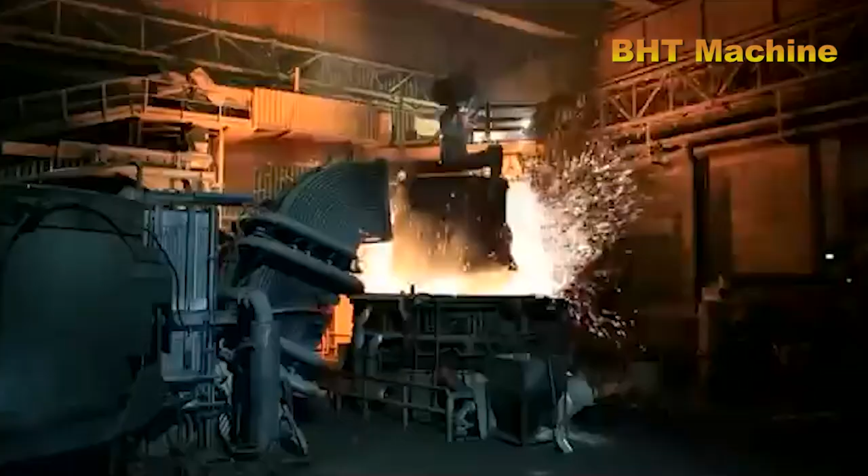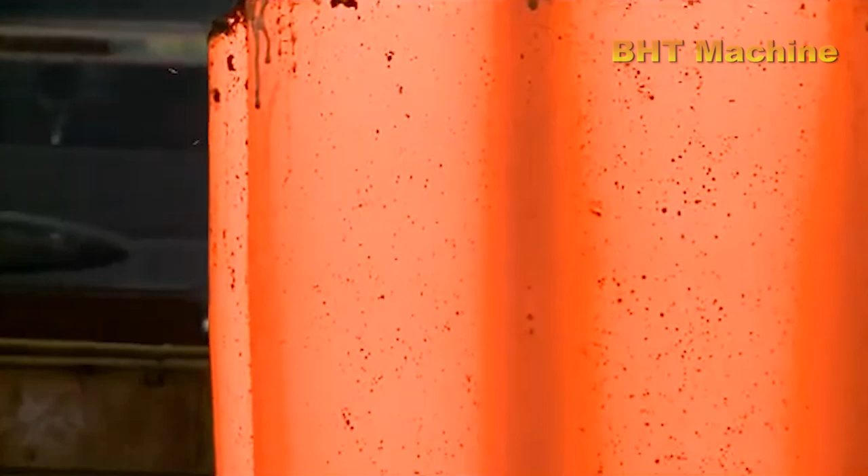Welcome to our video exploring the casting industry, an ancient craft that continues to thrive with innovation and creativity. Casting, or the process of shaping metal, is an art that blends high temperatures, modern technology, and human skill. From ancient bronze statues to advanced machinery components, casting has played and continues to play a vital role in the development of society.

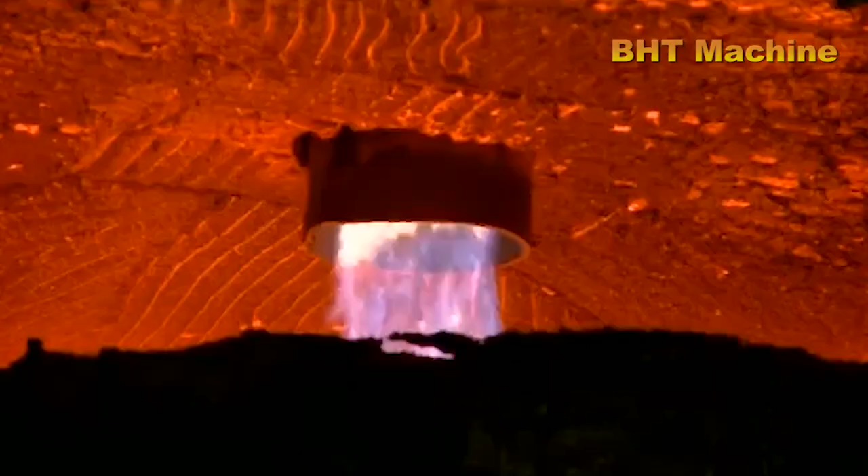Casting is the art of transforming metal into shape, a process that combines heat, technology, and creativity. From melting metal at extremely high temperatures, pouring it into meticulously designed molds, to producing finished products, every step in the casting process demands precision and dedication from the craftsman.

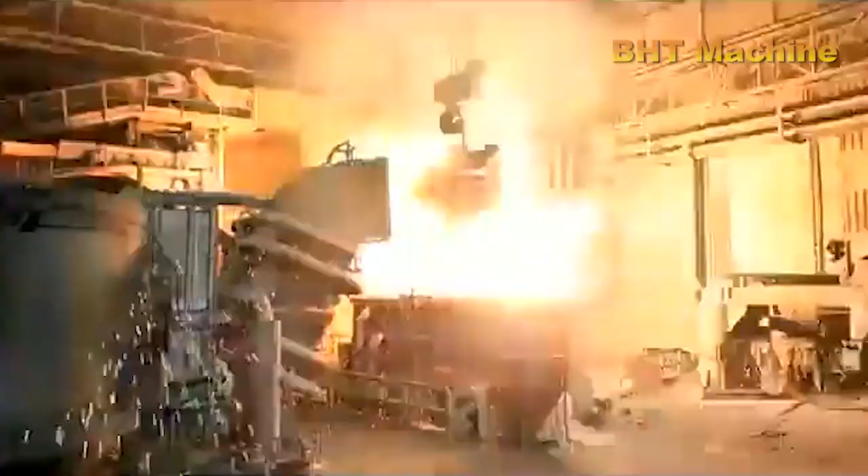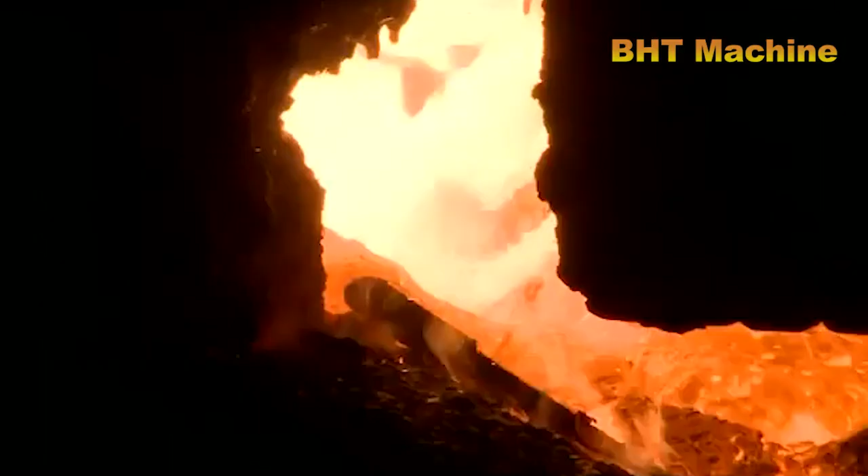Today, casting technology has reached new heights. Methods such as pressure die casting, centrifugal casting, and investment casting not only produce superior quality products, but also enable countless applications in key fields like the automotive industry, aerospace, and construction. These advanced technologies allow for the creation of precise, durable components tailored to diverse needs.

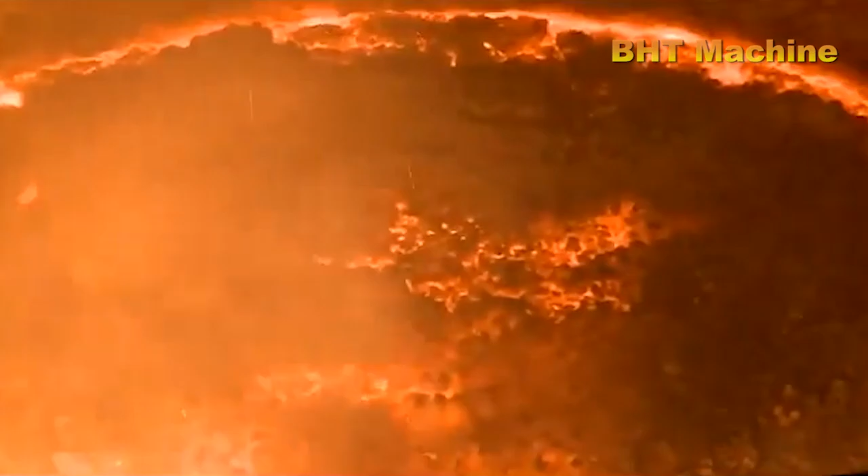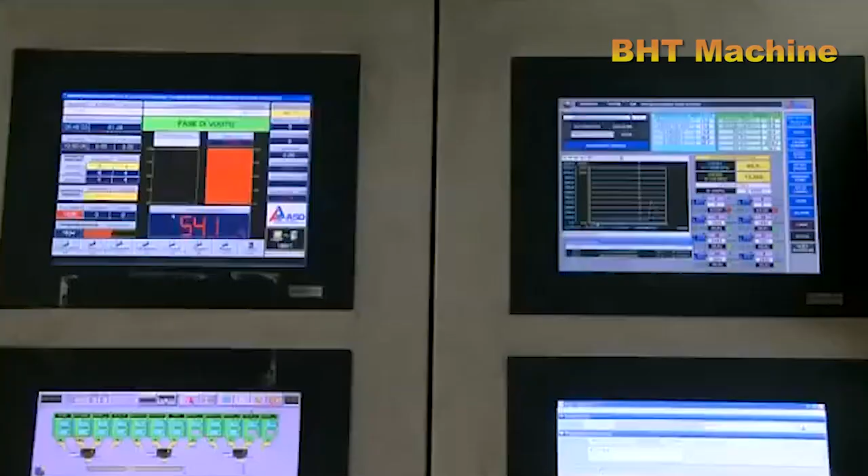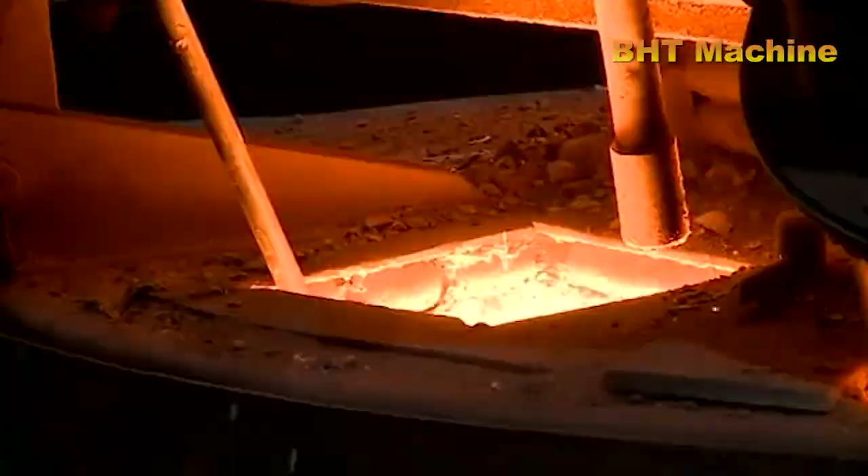Beyond technological advancements, the casting industry is also leading the way in environmental protection. Metals can be recycled almost indefinitely, conserving resources and reducing carbon emissions. Modern foundries are increasingly adopting renewable energy sources such as hydropower and solar power to minimize their ecological footprint. The combination of advanced techniques and a commitment to sustainability has reshaped the way we perceive this industry.

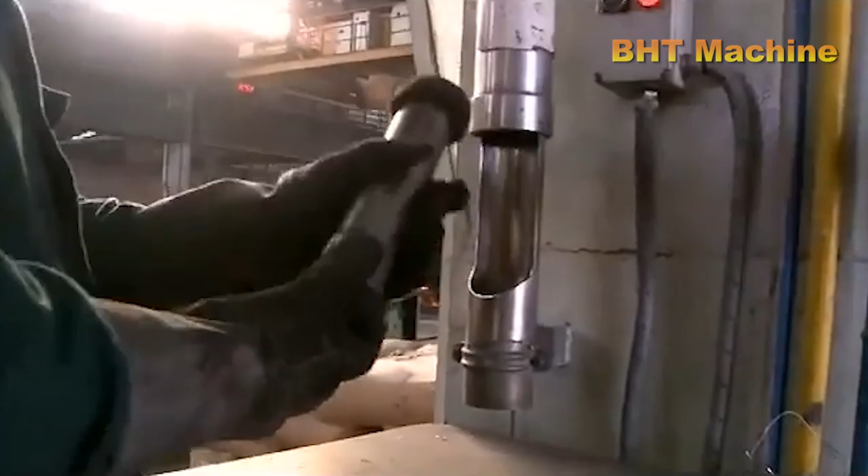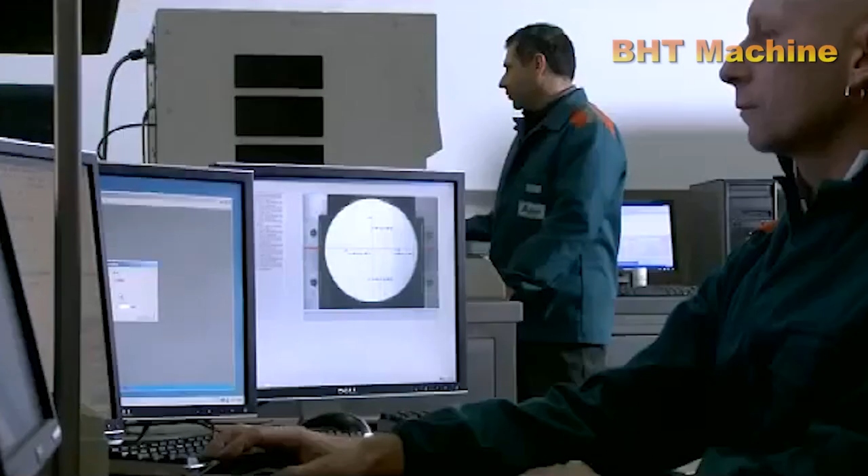Products from the casting sector are not just the result of creativity and labor, but also a testament to efforts to safeguard the future of our planet. Join me as we explore each step of this meticulous process, from melting metal and mold creation to the final product. Together, we'll witness how technology, human skill, and creativity come together to produce remarkable items that enhance our lives.

Casting is more than a profession. It's an art, a tradition, and a leap toward a sustainable future.

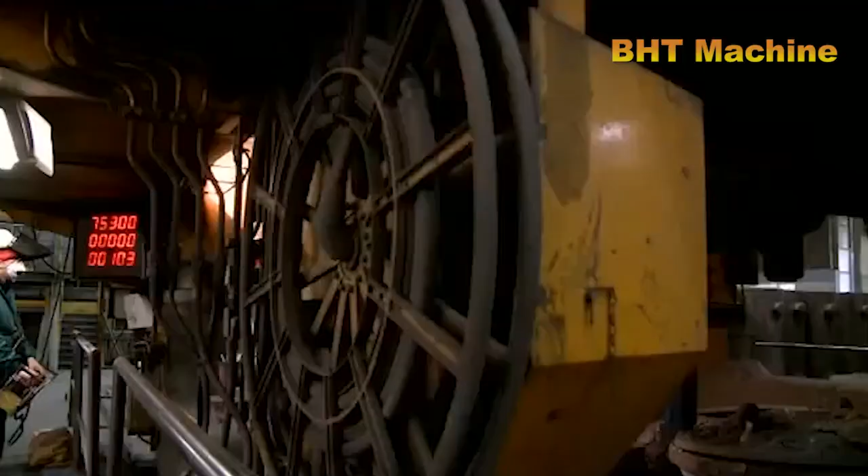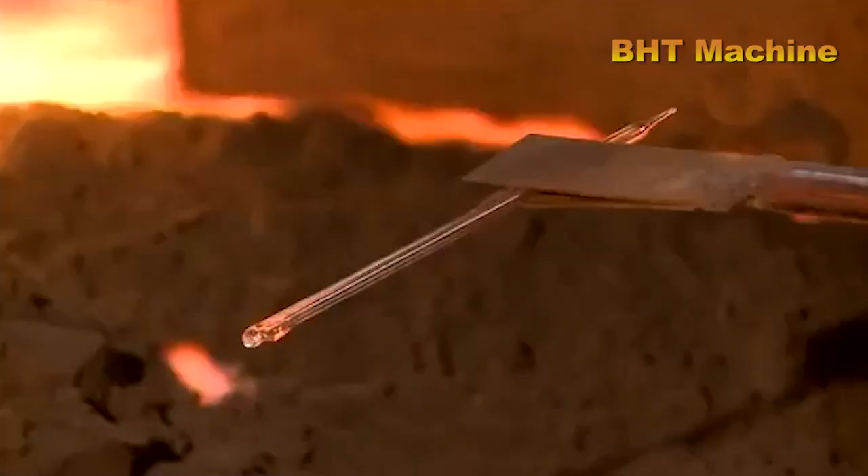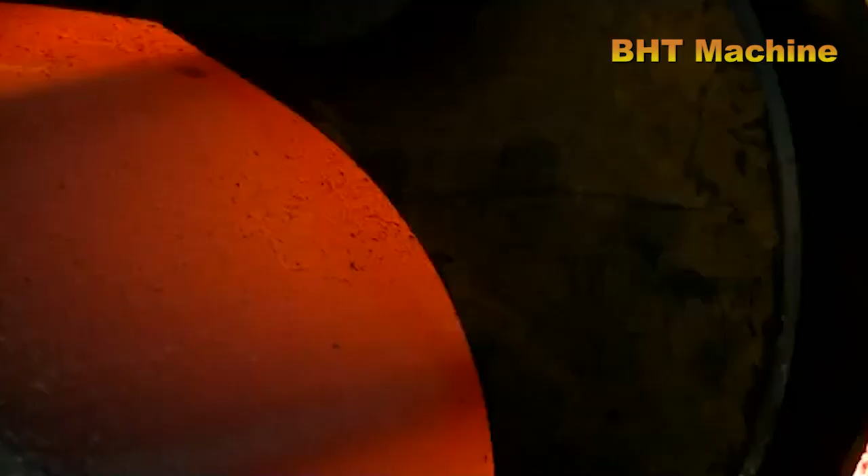The casting industry not only focuses on producing high-quality products, but also prioritizes sustainability in every aspect. One of the key highlights is the efficient recycling of metals. Metals such as aluminum, steel, and copper can be recycled almost indefinitely without compromising their quality. This not only helps conserve resources, but also reduces the negative environmental impact, especially in the context of global challenges like climate change and pollution.

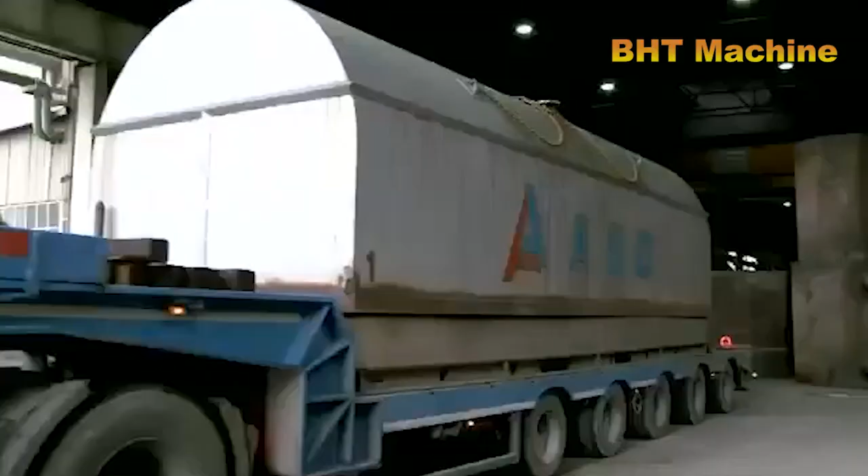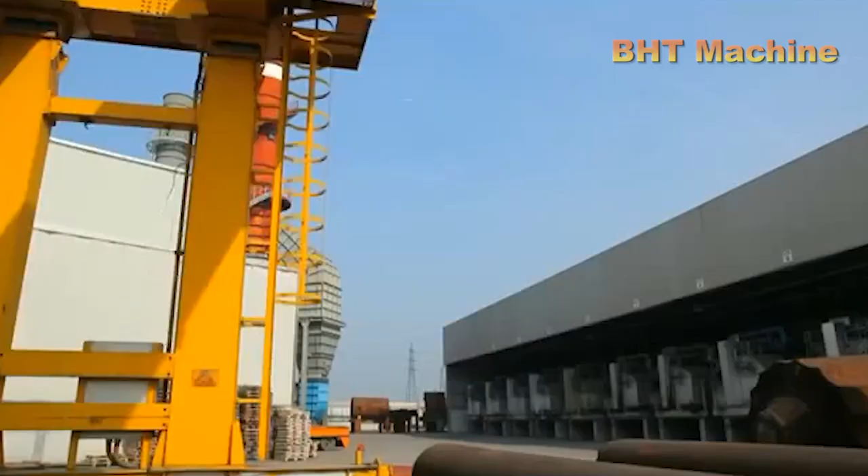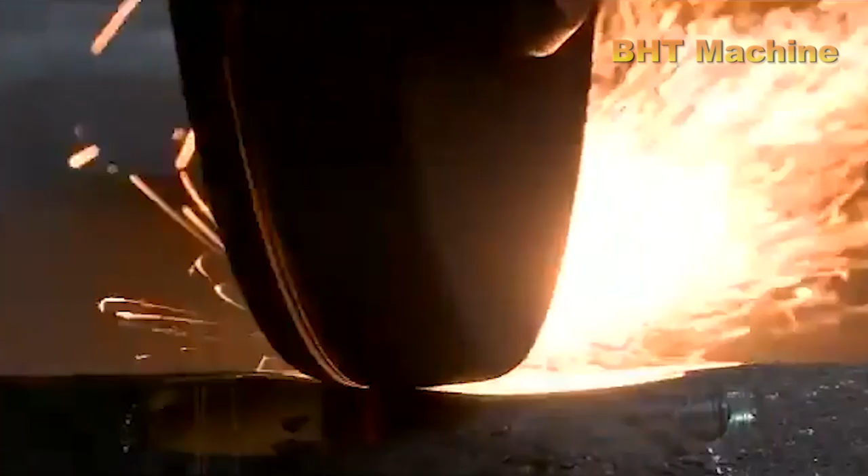In addition, the casting industry applies modern technology to optimize production processes. Artificial intelligence, AI, enhances production efficiency, from predicting and resolving issues to optimizing manufacturing processes. 3D printing technology is now used to create precise, cost-effective molds. Moreover, the development of new materials, such as super durable alloys, has contributed to lighter, more durable, and more efficient products in high-end industries like aerospace and automotive.

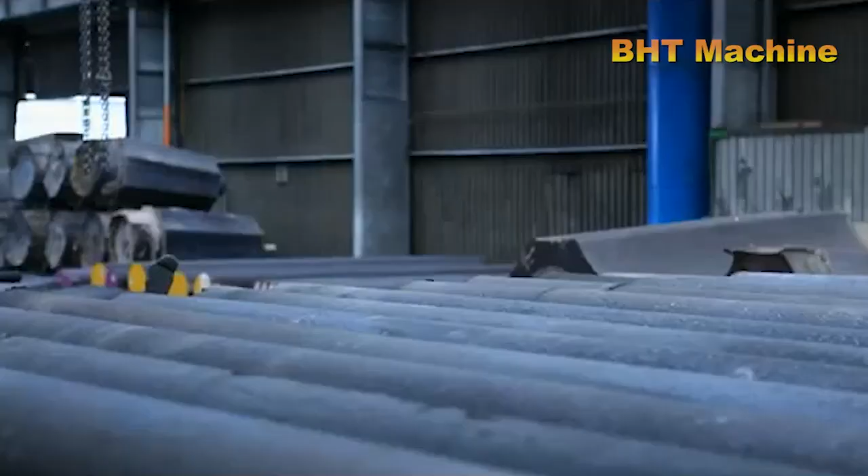With all these advancements, the casting industry is leading the way in combining manufacturing with environmental protection. Improvements in recycling and resource conservation not only enhance product quality, but also help create a green, responsible industry for the community and future generations.

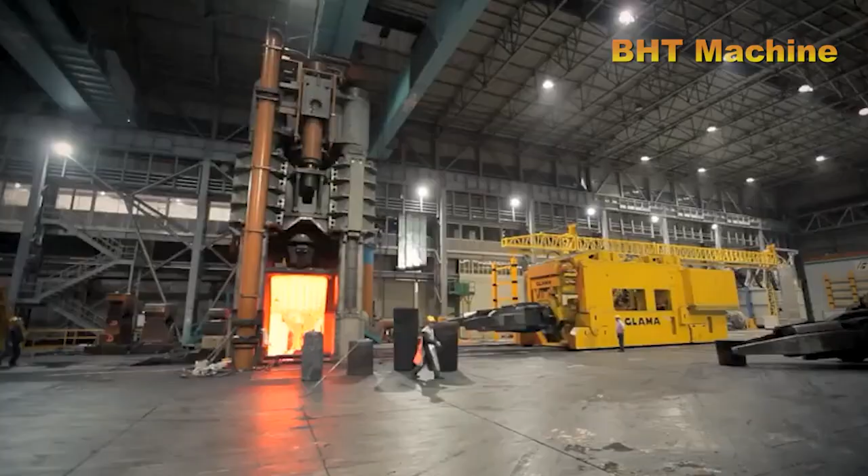Modern casting is entering a new era with enormous potential for growth. Together, let's delve deeper into the technologies, advancements, and trends that are shaping the future of the casting industry.

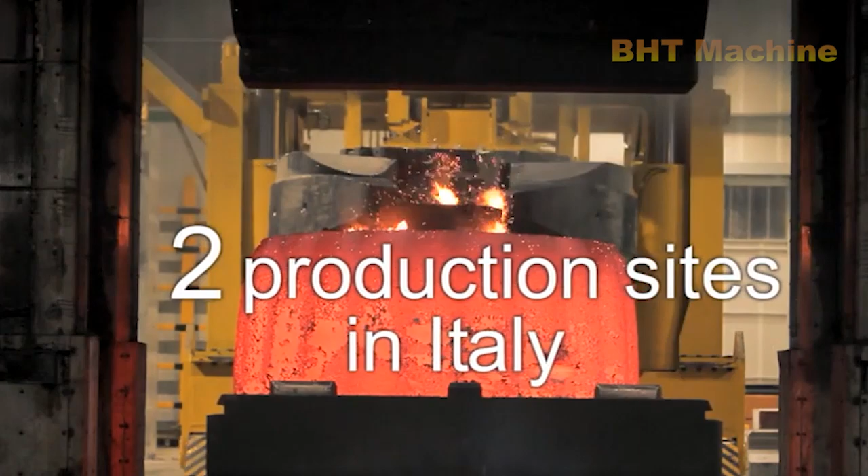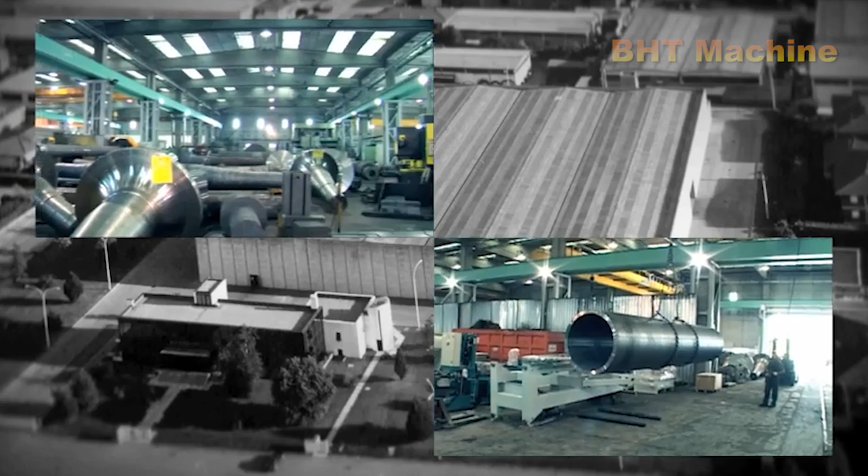The forging industry plays a vital role in the manufacturing of durable, high-performance components used in various critical sectors such as automotive, aerospace, energy, and naval industries. Forging is the process of shaping metal using compressive force, creating products that offer superior strength, integrity, and resistance to wear and fatigue. As the demand for more advanced materials and efficient production techniques grows, the forging industry is witnessing significant advancements, particularly in terms of technology, sustainability, and innovation.

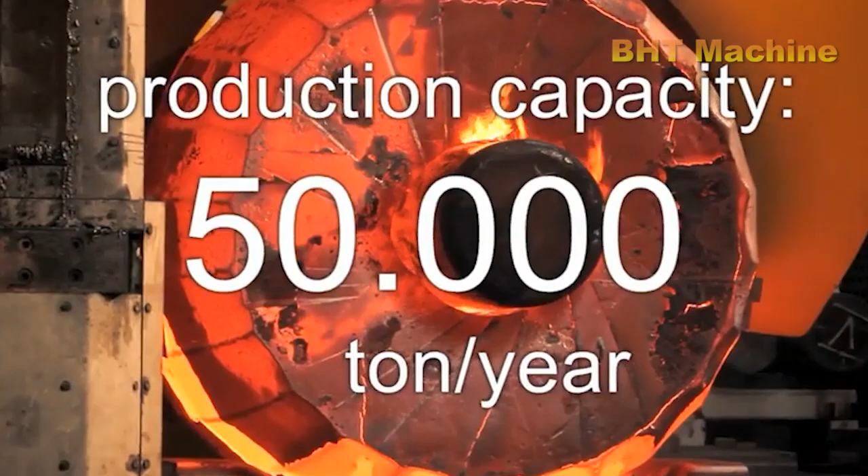One of the key drivers behind the evolution of the forging industry is technological innovation. Modern forging companies are embracing cutting-edge techniques to improve efficiency, precision, and quality control. Automation plays a major role in these advancements.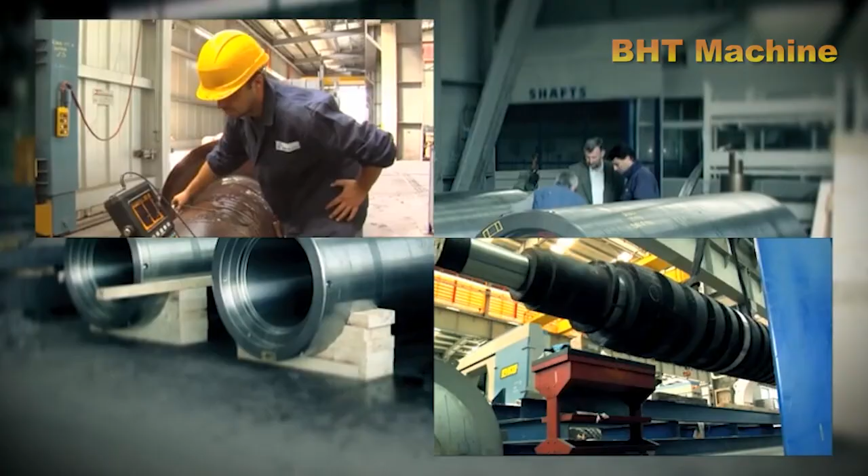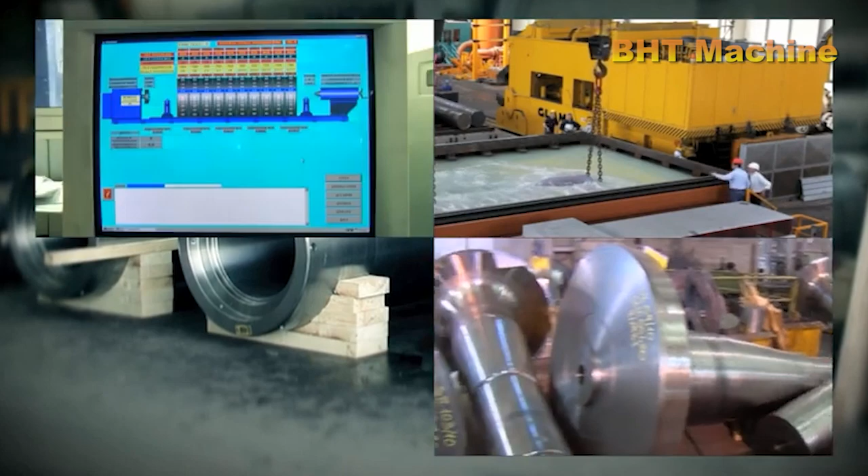Automated systems such as hydraulic presses, robotic manipulators, and CNC (computer numerical control) machines have enhanced the precision and speed of the forging process. These technologies allow manufacturers to create complex components with tight tolerances that meet the rigorous demands of industries like aerospace, automotive, and energy.

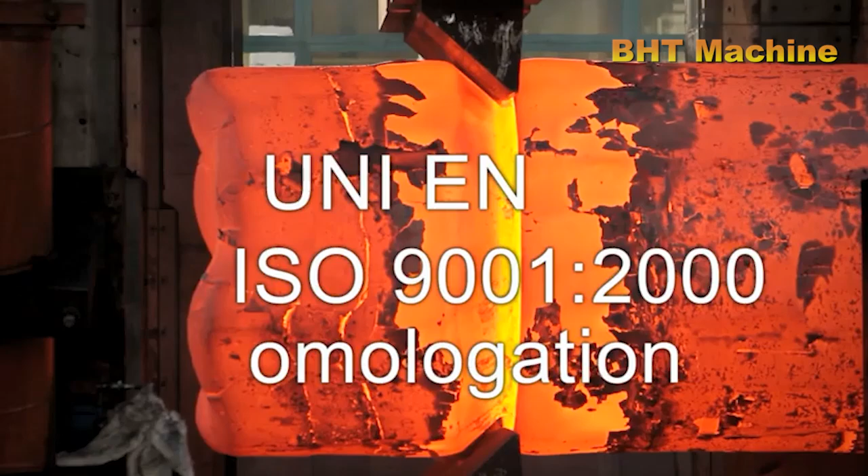For example, hydraulic presses with capacities ranging from 2,500 to 8,000 tons can forge large and intricate components, reducing human intervention and ensuring uniformity in the final product.

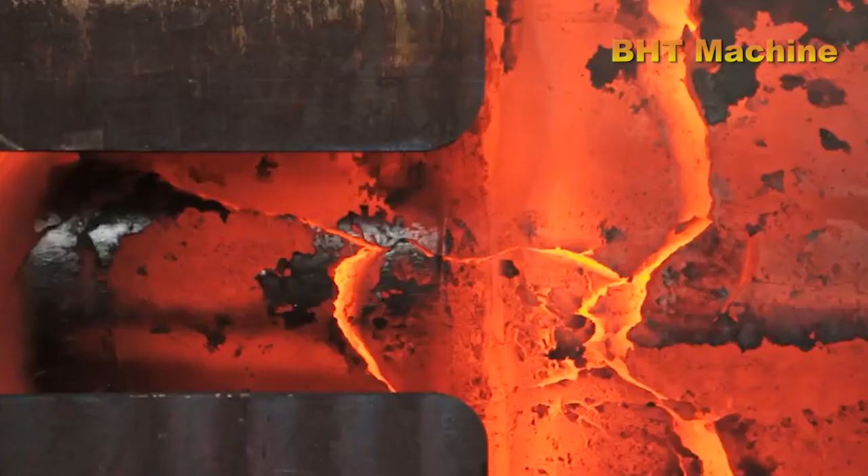Advanced heat treatment technologies, such as controlled quenching using water or polymer mediums, further enhance the mechanical properties of forged parts, improving their hardness and durability for high-stress applications.

The advent of 3D printing has also revolutionized the forging industry by enabling the creation of precise molds and complex geometries that would be difficult or impossible to achieve with traditional methods. This has led to cost savings, reduced lead times, and the ability to manufacture customized parts more efficiently.

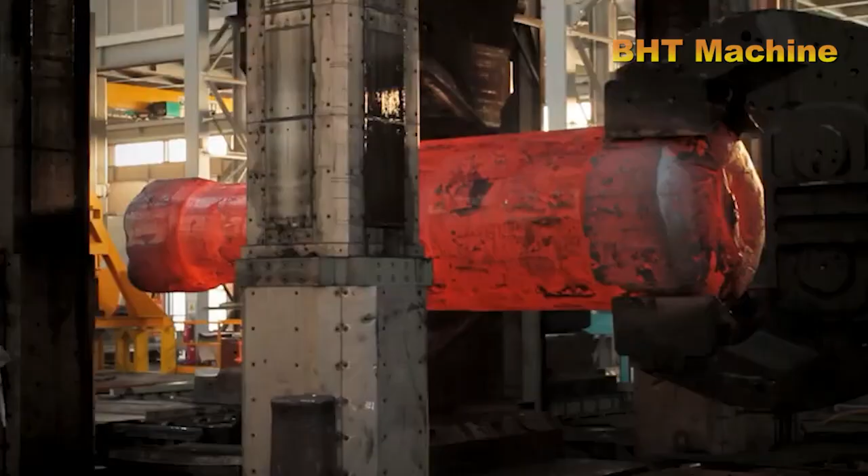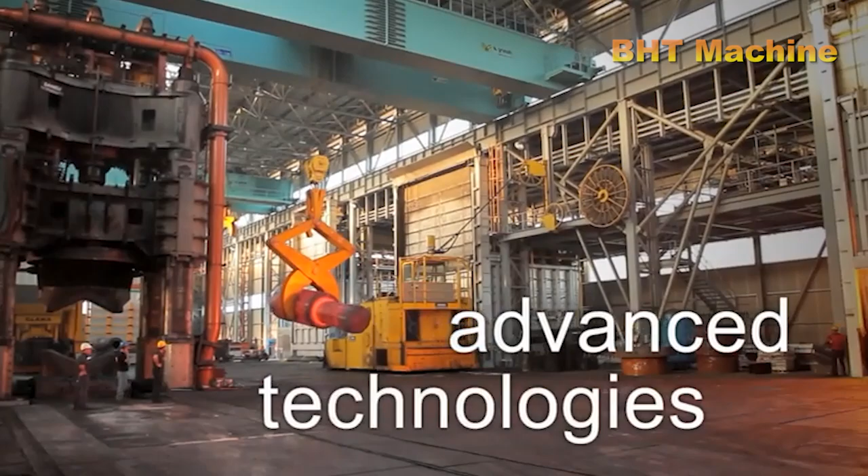As industries worldwide face mounting pressure to reduce their environmental impact, sustainability has become a central focus in the forging sector. One of the most significant contributions the forging industry can make to sustainability is through metal recycling.

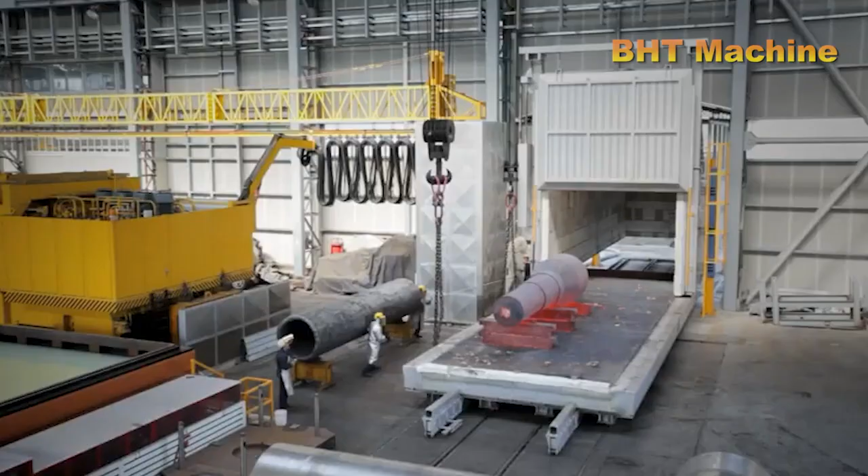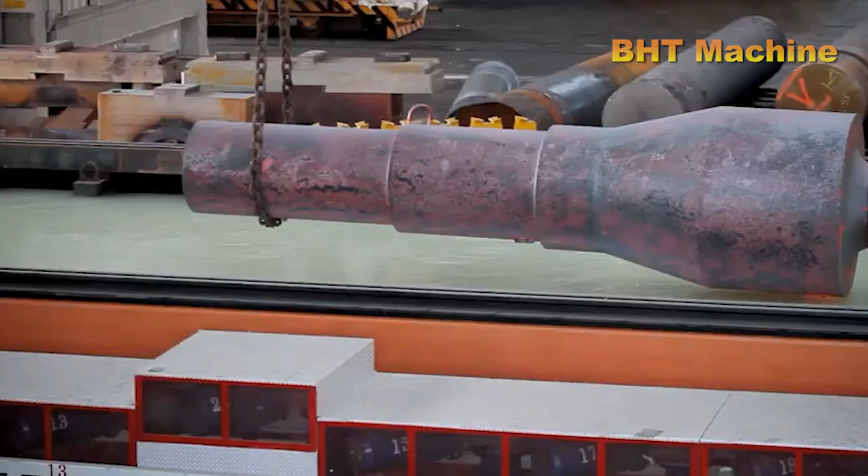Metals like steel, aluminum, and copper can be recycled almost indefinitely without losing their quality, making it a highly sustainable industry in terms of material usage. The ability to reuse scrap metal reduces the need for virgin materials, helping to conserve natural resources and lower the carbon footprint of the manufacturing process.

Many forging companies are also adopting renewable energy sources, such as solar and hydropower, to reduce their dependence on fossil fuels and decrease greenhouse gas emissions.

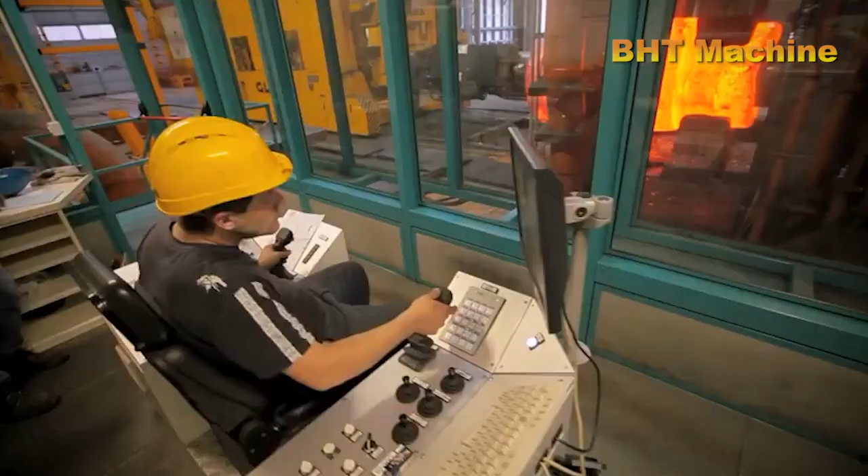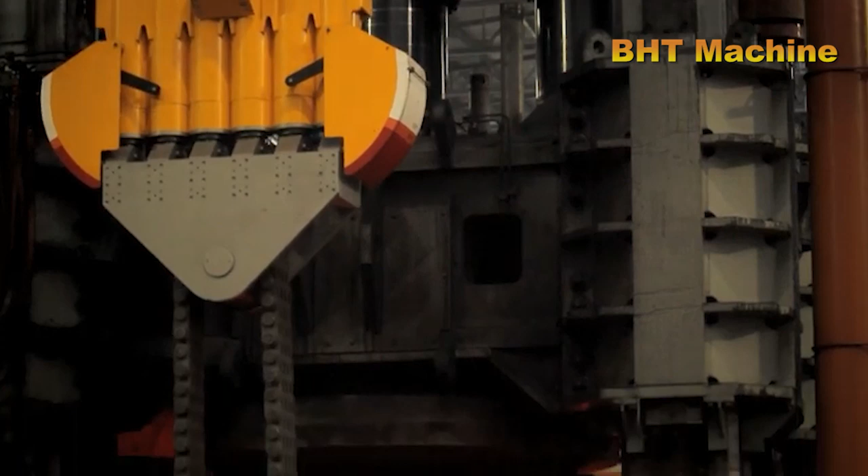Additionally, advanced manufacturing processes like hot charging, where ingots are heated directly on insulated trucks, help optimize energy consumption and reduce waste during production. Furthermore, forging companies are incorporating more energy-efficient technologies into their operations, such as energy-efficient furnaces and automated systems that reduce energy waste and improve overall process optimization. These efforts align with global initiatives to combat climate change and minimize the environmental impact of industrial activities.

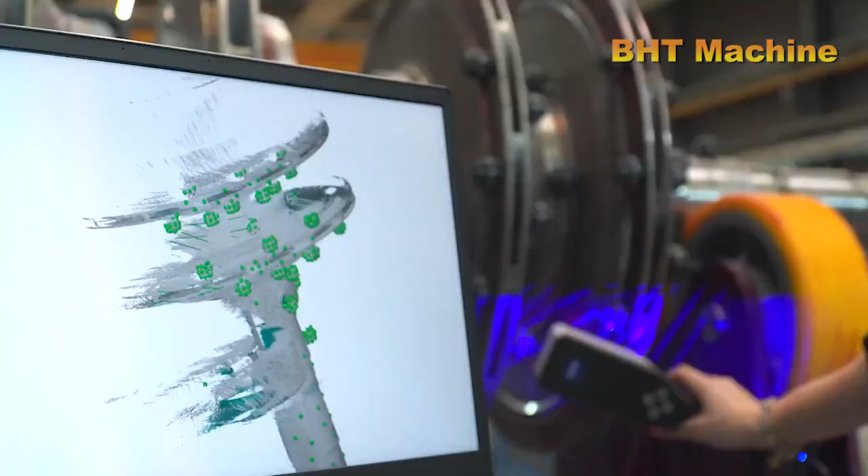The turbine manufacturing and production industry, despite its long history, remains a field that constantly innovates and evolves. Turbines are a crucial component in many industries, particularly in energy, aerospace, and oil and gas. The turbine production process requires a perfect combination of modern technology and precise manufacturing techniques.

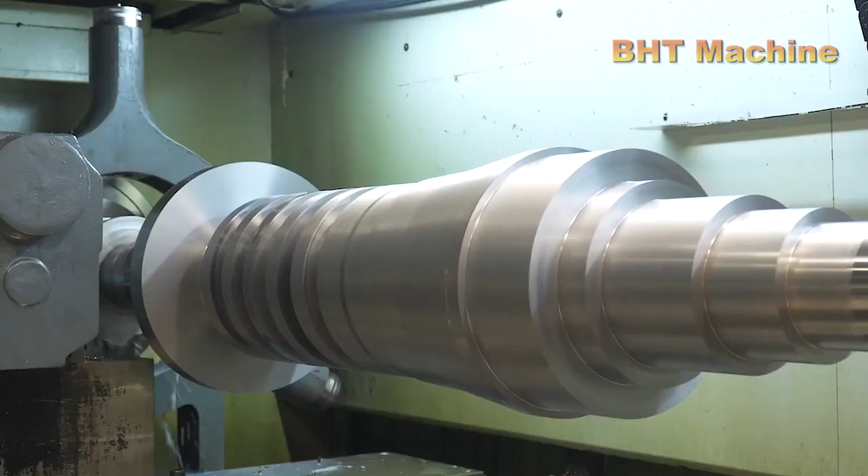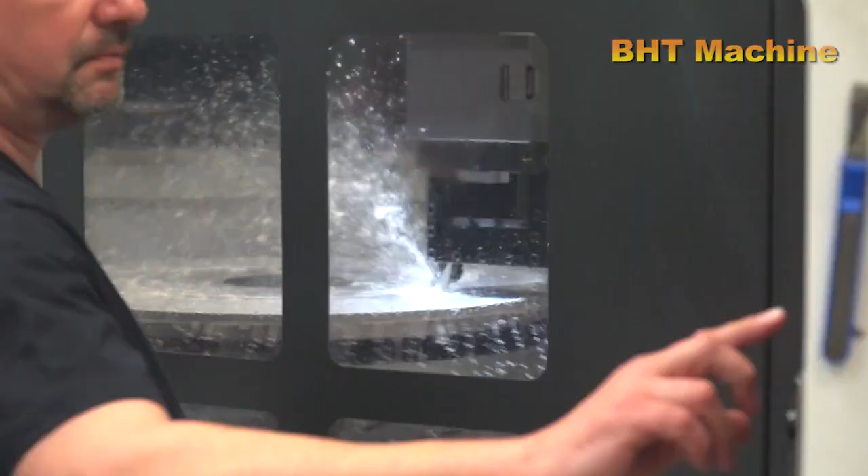Starting from the design phase, engineers must carefully calculate and simulate every detail to optimize the performance and durability of the turbine. Once the materials have been selected and processed, casting and forging the components require absolute precision, as any minor error could significantly impact the performance and safety during operation.

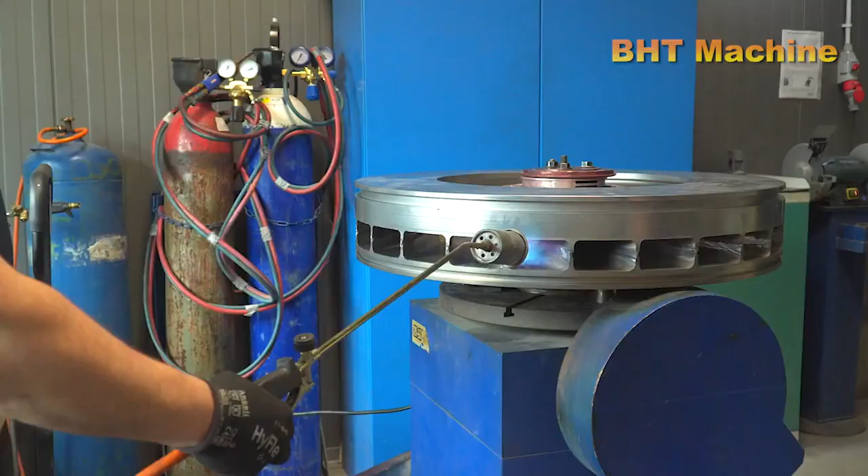Modern manufacturing technologies, such as 3D printing and artificial intelligence applications, are helping to optimize the production process, reducing costs while improving the quality and accuracy of turbine components. New, ultra-durable, and lightweight materials are increasingly being used, allowing turbines to operate more efficiently in harsh environments.

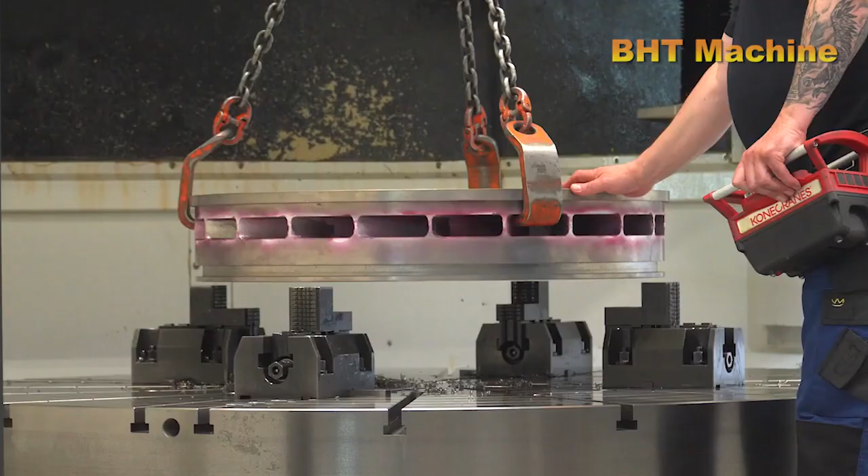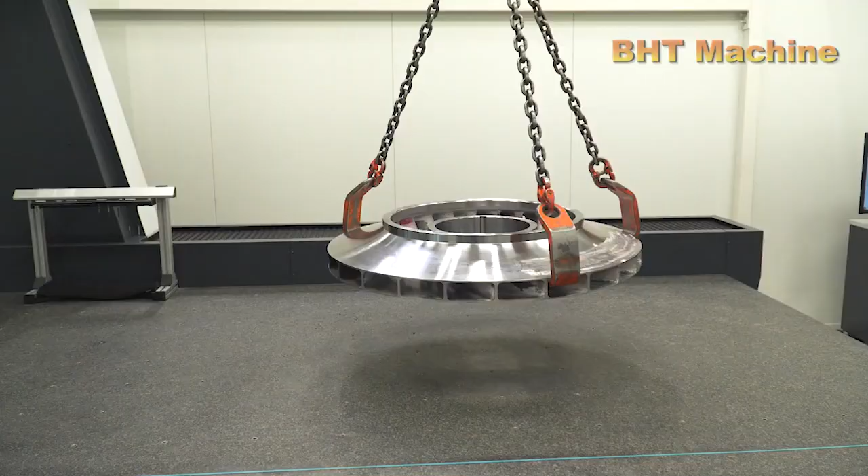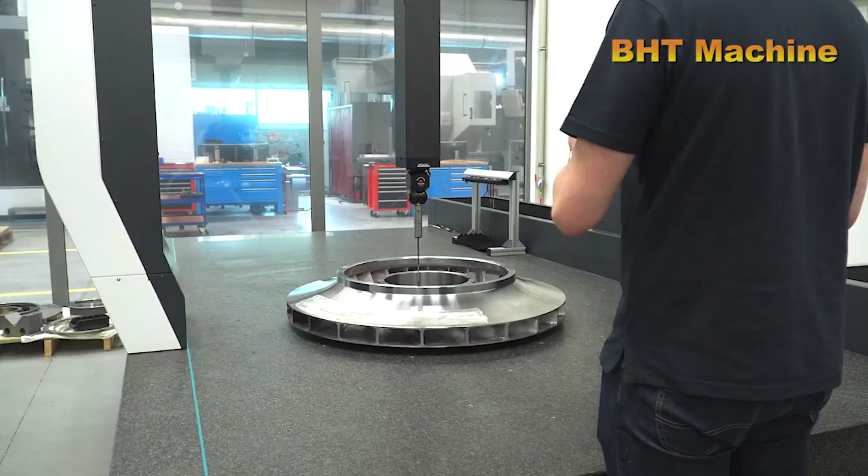In addition to advanced technologies, an important factor that cannot be overlooked is the impact of this industry on the transition to renewable energy. Wind turbines and turbines in the hydro energy sector play a crucial role in the development of clean energy sources.

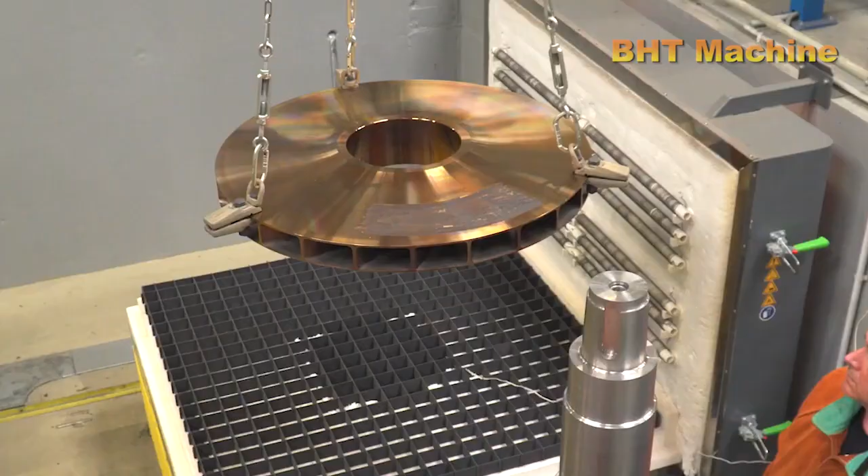Therefore, the turbine manufacturing and production industry not only meets industrial demands, but also contributes to sustainability and environmental protection. Looking to the future, the turbine manufacturing and production industry will continue to expand, with emerging trends such as the use of renewable energy and smart technologies. This is an industry that is continuously progressing, contributing to the sustainable development of society.